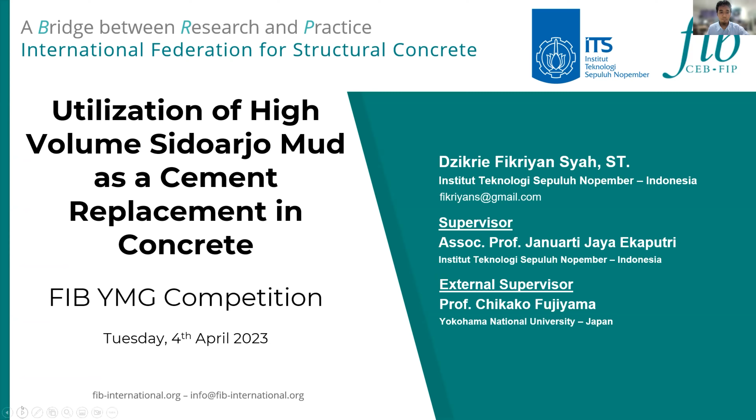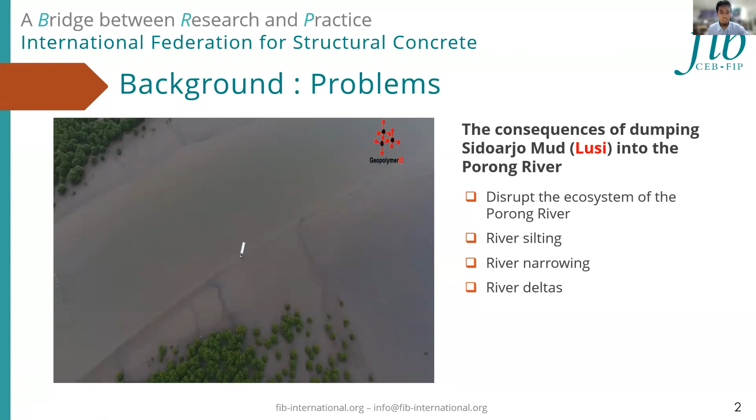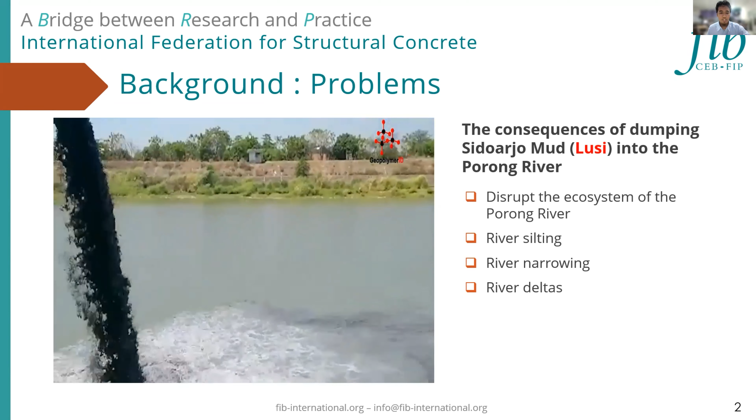So Sidoarjo mud, or Lusi afterwards, is volcanic mud that erupted from the earth because of an accident while drilling a gas well. The resulting mud was dammed by an embankment. Over time, the embankment became filled, prompting the authorities to take action to drain the mud into the Porong River. The implication of dumping Lusi into the Porong River is that the ecosystem of the Porong River is disrupted. Not only the ecosystem, but also the river itself becomes damaged by river silting, river narrowing, and also river deltas.

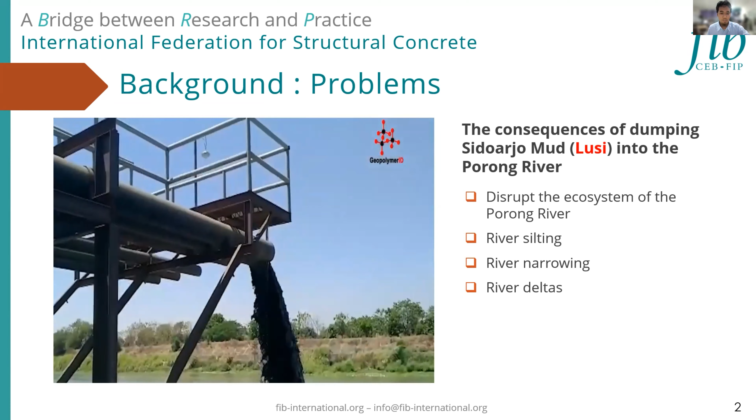So the aim of this research is to replace as much cement as possible with Lusi combined with calcium carbonate and ground granulated blast furnace slag, or GGBFS, while maintaining the mechanical properties of concrete. The fact that no studies have been done combining these three materials emphasizes how important this research is. The hypothesis of this study is that the resulting concrete has a lower strength, worse shrinkage, and worse workability, but a longer setting time, a lower hydration temperature, and an increase in packing density.

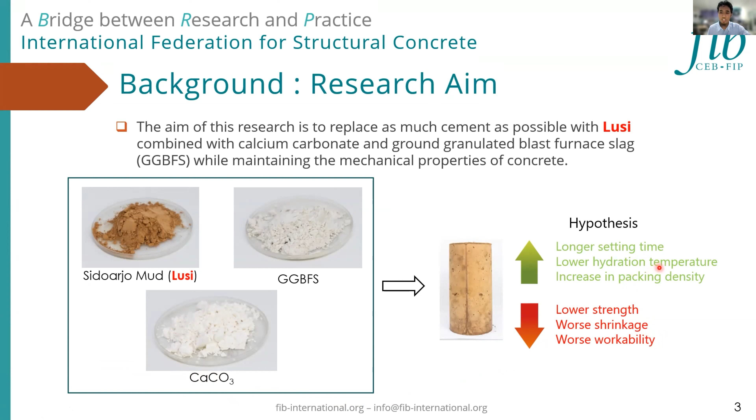This research is separated into two sections, the paste variation and the concrete variation. There are 6 variations of paste specimen: normal as a control specimen, and starting from 50 to 70% of cement replacement. So the first 2 digits here show the percentage of Lusi that replaces cement. The letter L denotes Lusi, the letter C denotes an additional 5% calcium carbonate. The letter N denotes that some of the water has been replaced with natrium hydroxide solution. And the letter S denotes an additional 5% GGBFS.

The tests carried out were setting time test, pH test, compressive strength test, and porosity test. After that, 3 variations have been selected based on 28 days paste compressive strength to make them into concrete specimens. The tests carried out were setting time test, slump test, hydration temperature test, autogenous shrinkage test, compressive strength test, and splitting tensile strength test.

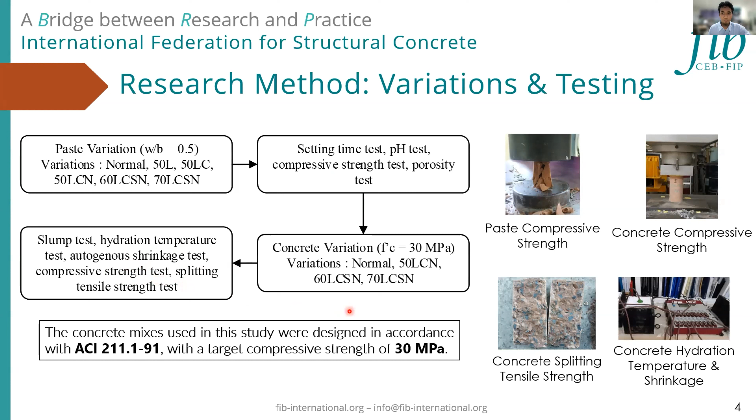And next is the concrete compressive strength test. The result of the concrete compressive strength test shows that the Lusi variant has a good early strength at 7 days. Although the Lusi-containing concrete exhibits high early strength, its compressive strength is lower than that of the normal specimen after 28 days. However, all variations had achieved the targeted compressive strength of 30 megapascals. There was no noticeable difference in age from 28 days to 56 days, which indicates that the concrete mixture has run out of materials to hydrate.

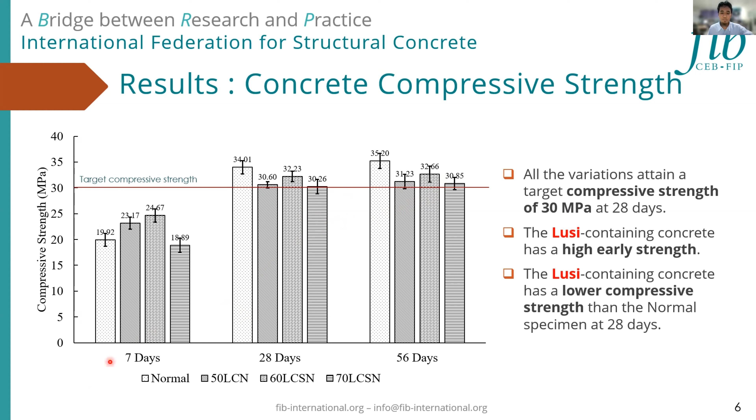So if we recall the paste compressive strength at 7 days or 28 days, none of the variation compressive strengths are comparable to or even higher than those of the normal variation. This may raise a question: how could the concrete have good compressive strength? It's to say there is a factor involving aggregates that results in the good compressive strength of concrete.

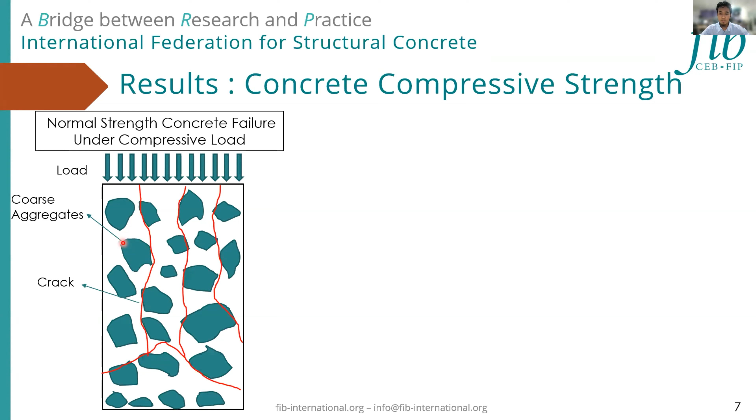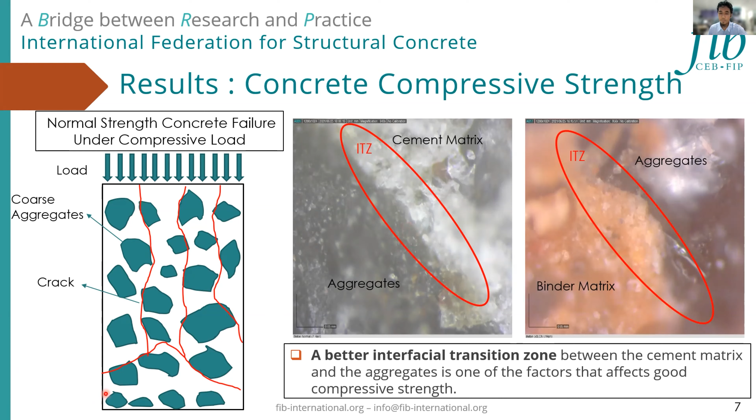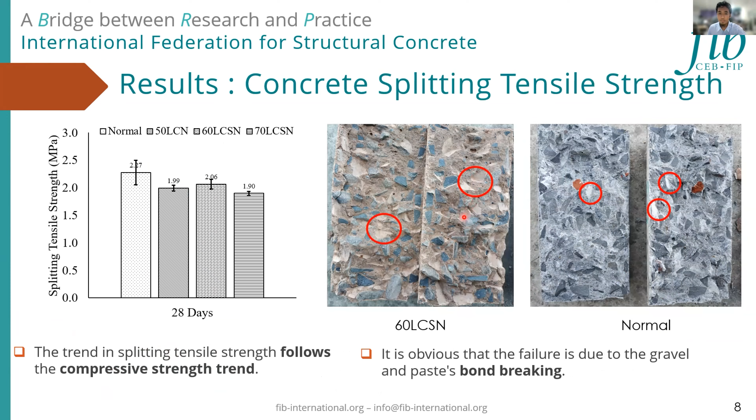Surprisingly, Lusi concrete has less autogenous shrinkage. There are two reasons for achieving this result. First, an improved early strength offered a support in order to restrain the shrinkage. And second, the relatively small particle size of Lusi, calcium carbonate, and GBFS results in a higher packing density.

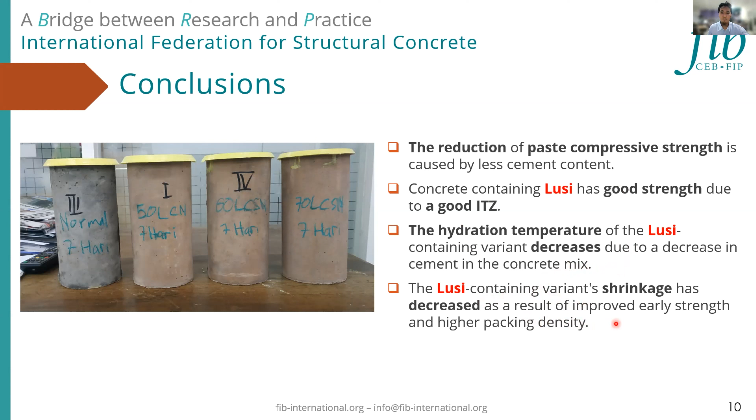And from the result that has been presented, it can be inferred that the reduction of paste compressive strength is caused by less cement content. And the concrete containing Lusi has good strength due to a good ITZ. Third, the hydration temperature of the Lusi containing variant decreases due to a decrease in cement in the concrete mix. The Lusi containing variant's shrinkage has decreased as a result of improved early strength and a higher packing density.

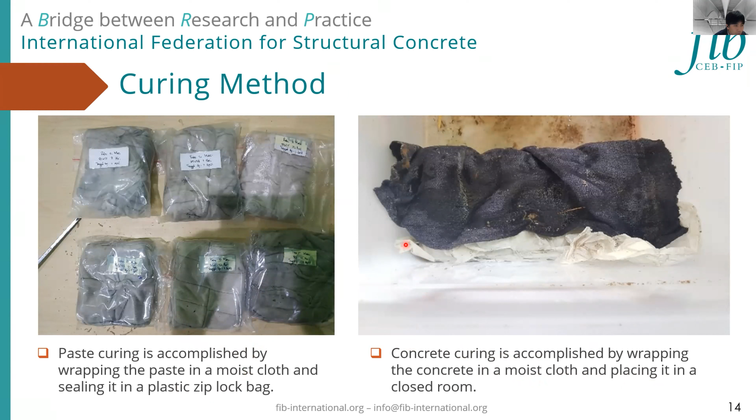Okay, yeah. Then can you show me slide number 5 again? Like the strength development of each series. Yes, yes. To me, it seems like the series with Lucy replacement, the strength still keeps increasing even after 56 days, while the normal cement looks like it has a constant value after 28 days. But what if you measure like 90 days or longer age for these kind of specimens? Will they be similar to the OPC series?

So yeah. Unfortunately, I don't have time to make the 90 days specimen, so I have no result for a longer time than 56 days. Especially the 50L series significantly keeps increasing, and if you find the strength can be almost equivalent to the OPC series at the longer age, then people just have to consider the appropriate applications for this kind of material, and there will be no problems in terms of the strength. Just a comment. Thank you very much.

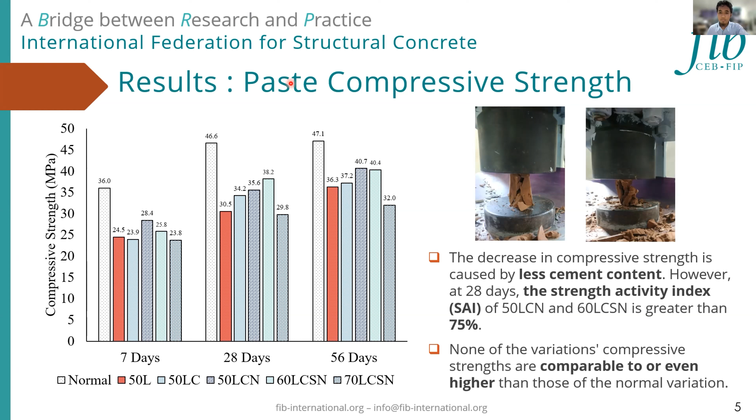I imagine the reduced hydration temperature could be helpful sometimes as well in cases where early thermal cracking is a problem or a risk. Yeah, the hydration temperature shows that the Lusi variation decreases the peak hydration temperature by about 9% to 10% compared to the normal variation.

It is good to use it in mass concrete, such as maybe in a raft, or a foundation, or the pillar of a big bridge.

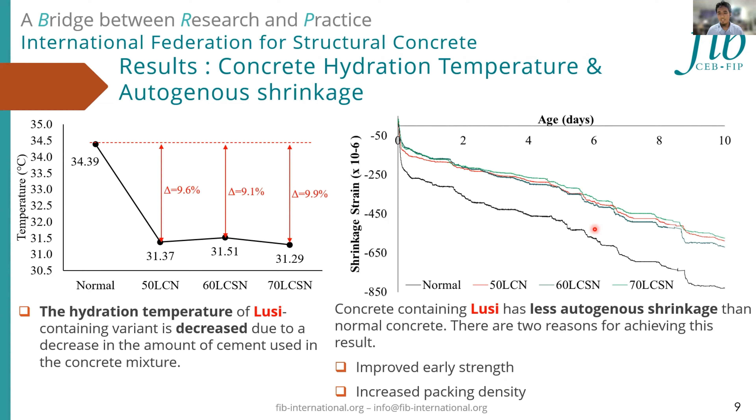Thank you very much. That's all.